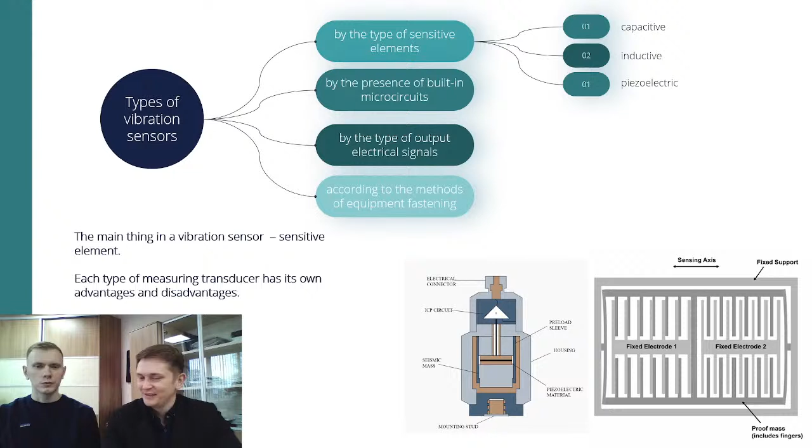So our sensor is a MEMS sensor. Which advantages? I think Vladislav will tell you more.

Good day everyone. My name is Vladislav, and I'm an embedded software engineer at Passat Innovation. So let's not waste time and start with the benefits of the VTS 3D. The first benefit of our sensor is noise immunity.

Yes, because our sensor is digital, it is not affected by noise, and the signal you receive, you can be sure that it's accurate and the data is not damaged or anything else.

The next benefit of our sensor is the length of the connectivity line. VTS 3D may have a connectivity line up to 1200 meters.

Plug and play connectivity. Because it is digital, you can easily connect our sensor, for example, into your PLC or PC. All you need to do is start reading the data. Compared to the class of analog devices, you don't have to connect converters to process the data, to write your own math algorithms, and anything like this.

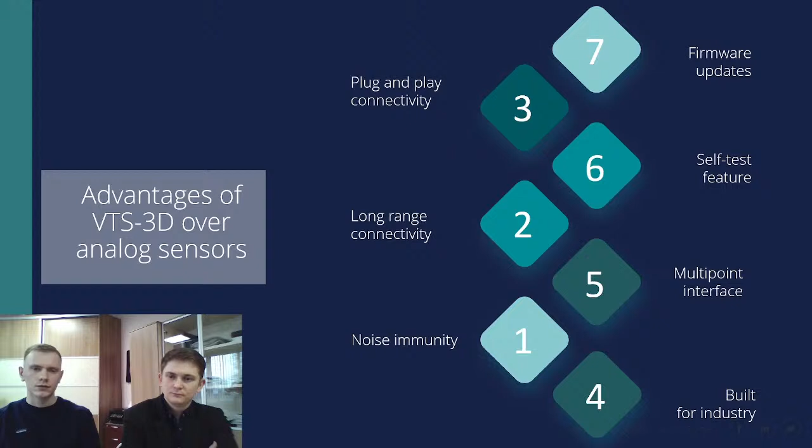Yes, as Vlad says, we can develop and easily update our sensor. For example, in January we had just 17 parameters: 15 parameters of vibration and 2 parameters of temperature.

About vibration, we had 5 parameters in 3 axes: RMS vibration acceleration, RMS vibration velocity, RMS vibration displacement, peak to peak, and peak factor.

And this month we have developed and added an additional parameter: frequency with maximum amplitude. About temperature parameters, there is the temperature of the casing of the equipment and the temperature of the environment.

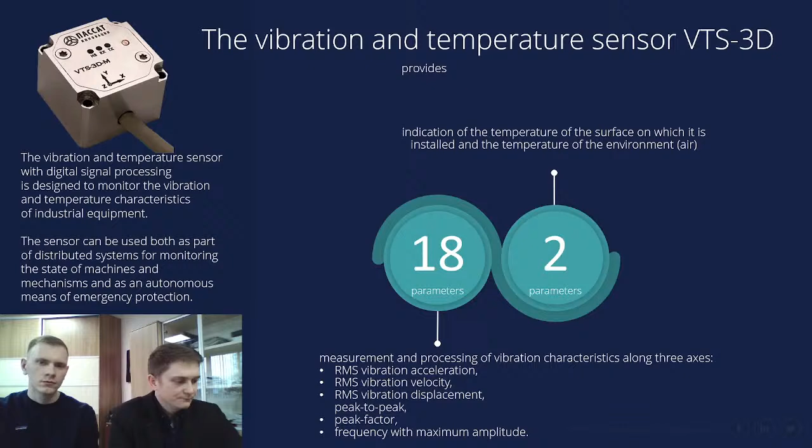About technical specification characteristics, our sensor has a frequency band for measuring vibration acceleration up to 5000 Hz. At this frequency we can guarantee good measuring with the errors that are shown here.

Also, our sensor has a degree of protection against dust and moisture. It is IP68.

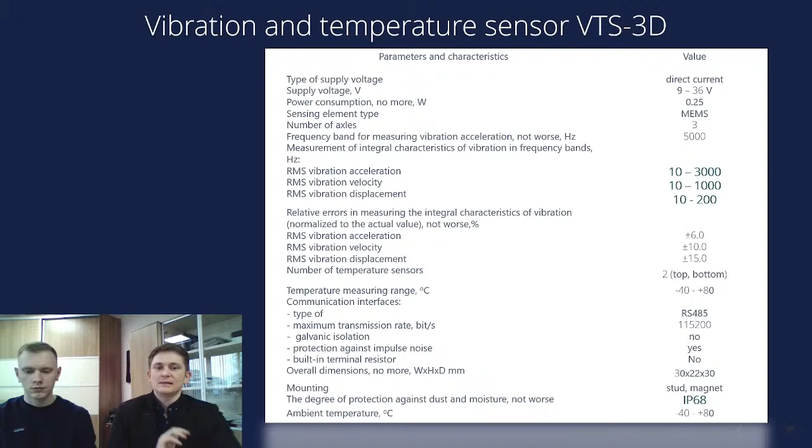Yes, the sensor has a lot of advantages. It can take a lot of parameters, but it has small dimensions - not more than 3 centimeters. The cable of the sensor is up to 2 meters.

Also, in the set of supply we have mounting platforms to install the sensor on the equipment. In the standard set of supply we have a stud fastening platform to install with a screw, and a magnet platform for faster installation of the sensor on the equipment. It is an additional item.

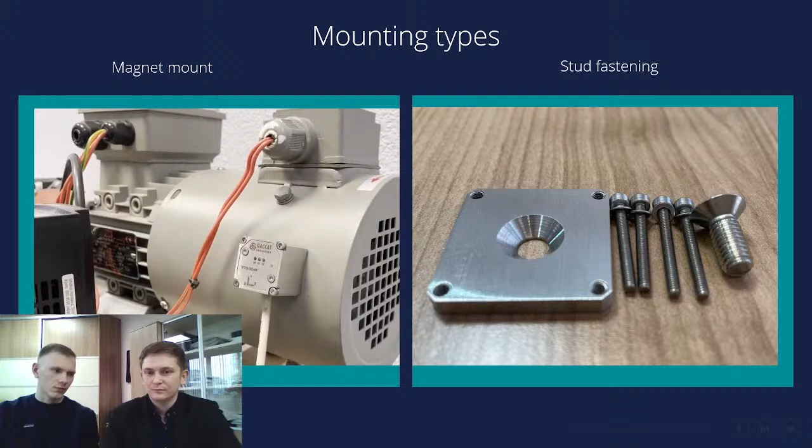About communications - in the general version, the sensor transmits data over RS485 according to Modbus RTU, but it is also possible to implement the sensor with CAN-open or LoRaWAN interfaces or protocols.

Let's talk about connection scenarios. Many modern PLCs support the Modbus protocol out of the box, and you can easily connect our sensor directly to a PLC, or if you don't have such a PLC, you can use, for example, a Modbus RTU to Modbus TCP gateway and simply migrate to Ethernet networks.

You can connect up to 32 devices in one port of the controller with Modbus RTU, without any additional devices. For example, to work with piezoelectric analog sensors, you should have additional infrastructure, additional converters, but here you can just connect one sensor to one port of the controller.

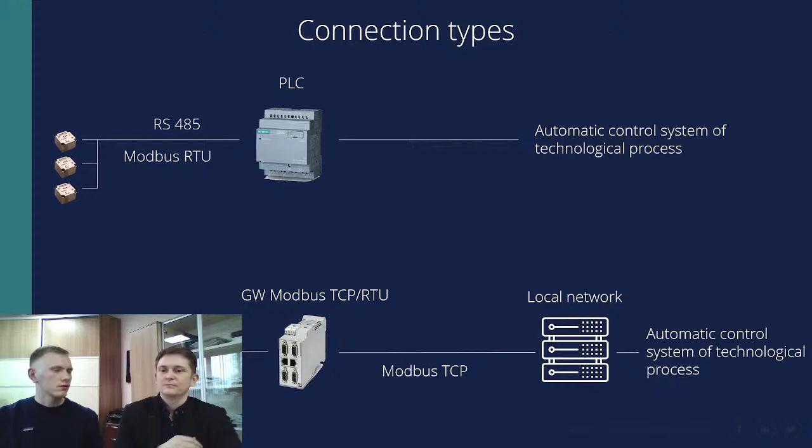And to work with sensors, we built our own software. Our software supports Modbus RTU and Modbus TCP protocols. You can configure sensor connection parameters, for example baud rate or slave ID, or if you talk about TCP connection, you can set your IP address, etc.

So you can also view the data. This software is free, you can download it on our website. So when somebody buys our sensor, they can download this software from our website and configure it to work with the sensor.

For example, you can also connect not only with a PLC, you can also work with a computer using an RS485 to USB converter.

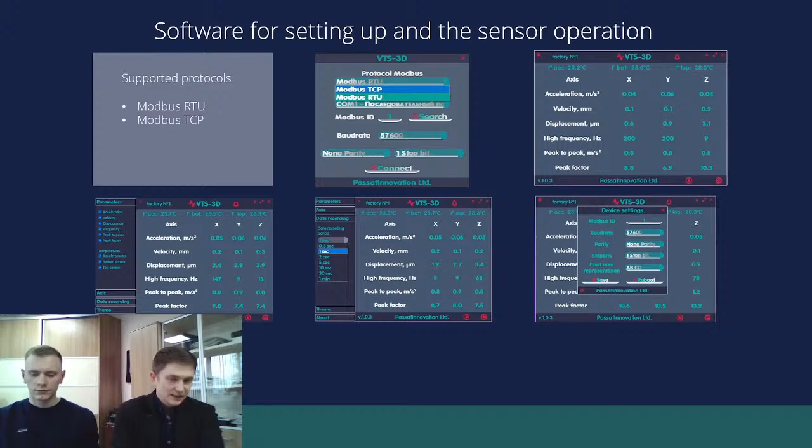So, I think it will be available in late February, yes? Yes, this month we will add it to our website.

Our sensor was developed in 2021, and we made market research to see our competitors, and we found a competitor from the USA. We bought their sensor and made our own test with our vibration stand, to compare the results of measuring of these two sensors.

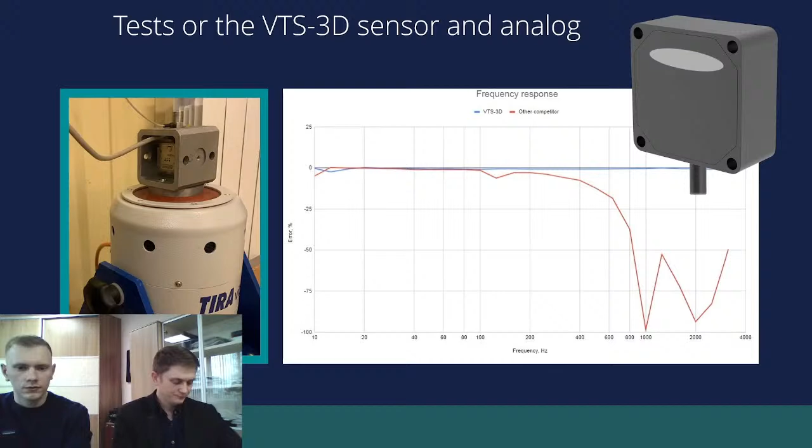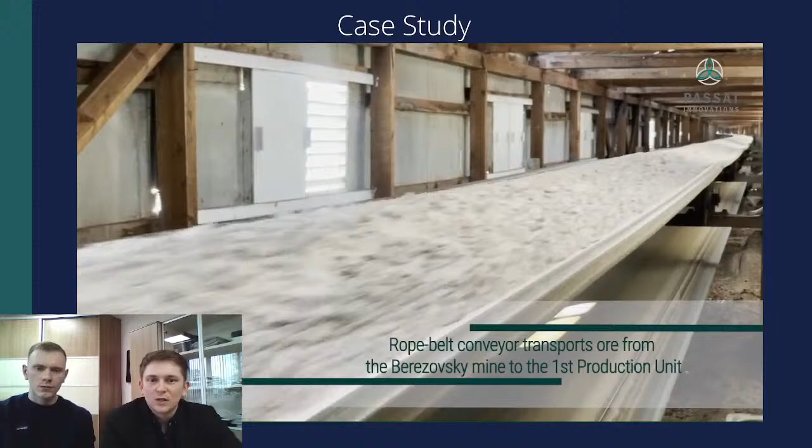So our sensor can be used - you can install it on pumps, motors, vents, and other equipment. For example, one of our end customers installed these sensors on a conveyor, a long-distance conveyor more than 10 kilometers long.

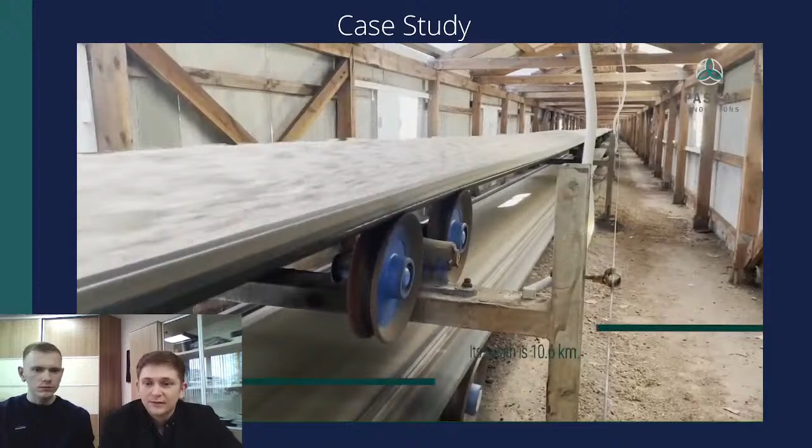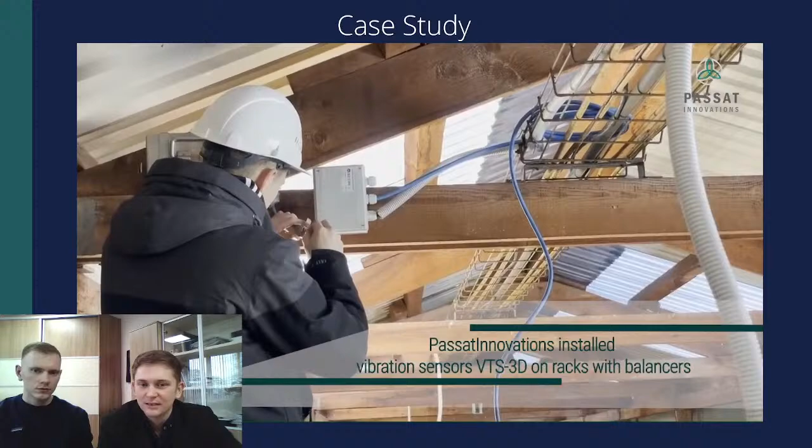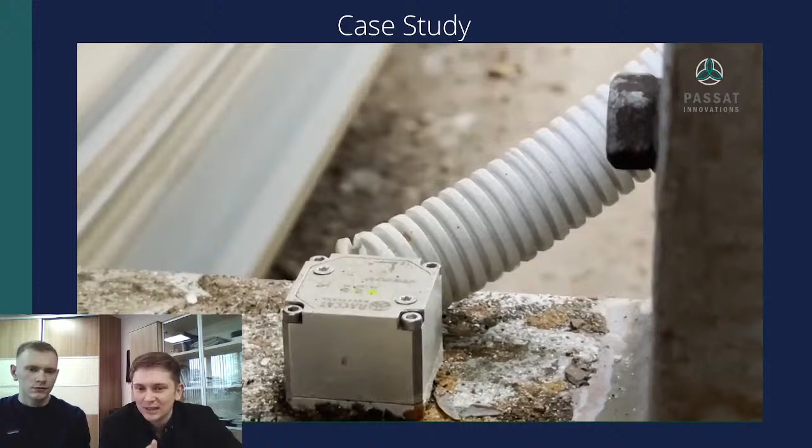To monitor the condition of these conveyor parts, the specialist of the end customer goes around this conveyor and listens and looks at the condition every day. It's a waste of time, a waste of money, a waste of human resources.

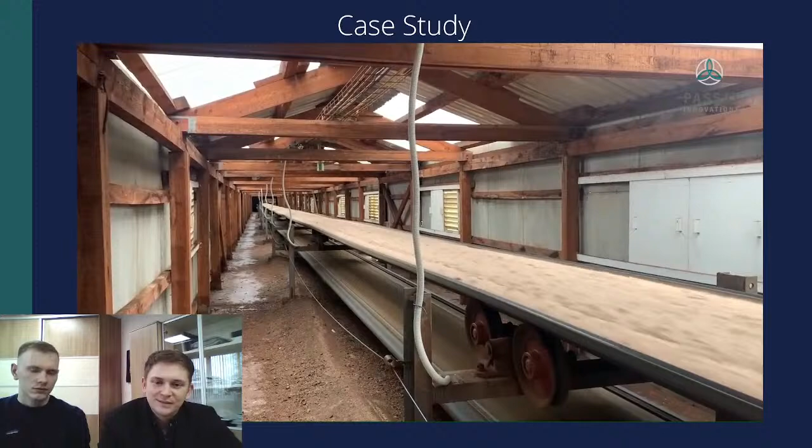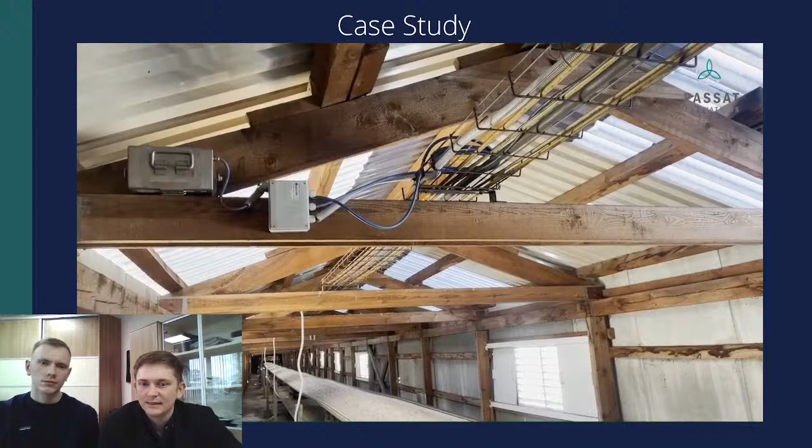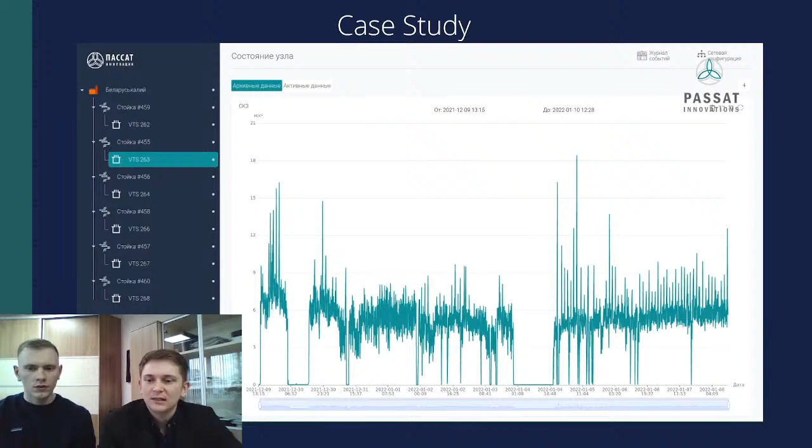We provided testing at that moment with 6 sensors on this test, and we collect the data from 6 sensors and transmit the data to the company using our wireless communication device.

In the company, they get this information and process it by our software. At that moment, we are developing our vibration monitoring system, and in this slide you can see some results.

Every day we add additional functions, and here you can see some results. For example, at the first part of this graph you can see a high peak. So it was at the beginning of our such project.

We collect the data from the sensor with the frequency 1 time per 10 seconds. Then we change the configuration to collect the data 1 time per 1 second. The second half of the graphic shows more informative results. Also, we add the moving average parameter.

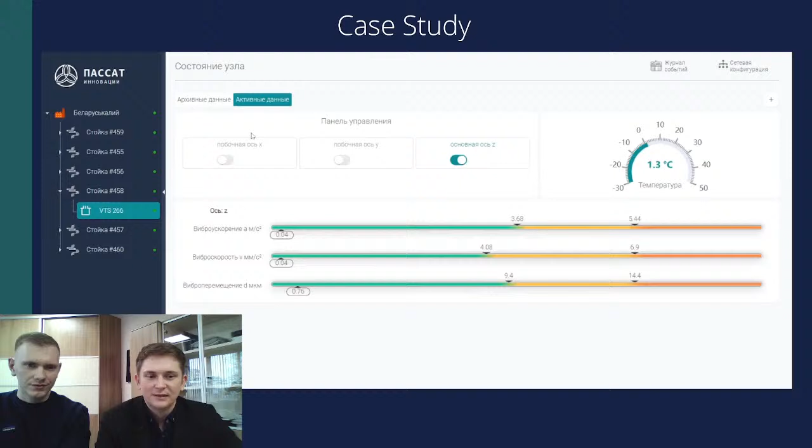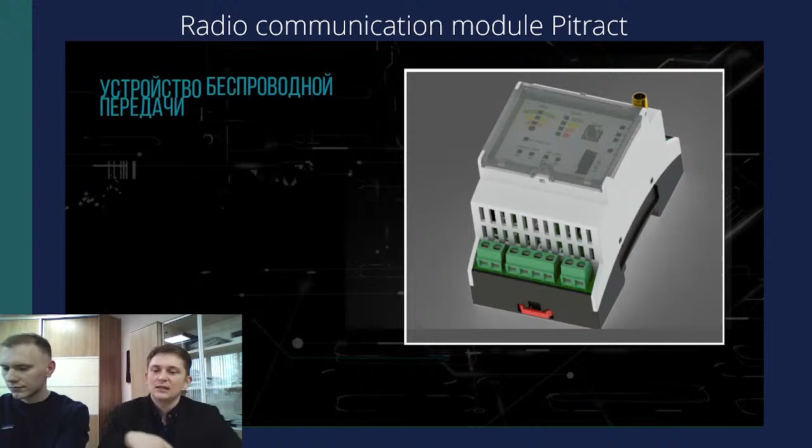As I said, to transmit the data, we use our radio communication module. The sensors are installed at 2 kilometers from the company, from the enterprise. So our device called Pitract helps to transmit the data up to 2 kilometers without cables and mobile connection.

About perspectives of the development of our sensor: in the nearest future, we will finish the wireless version, and it will use LoRaWAN technology to transmit the data, and also it will have power supply from batteries. Our aim is to make the lifetime of the batteries up to 2 years, I would say no less than 2 years.

And the next step that is also in process is explosion-proof design, to use our sensor in oil and gas production and some minings and so on.

And the final maybe step is to produce an industrial equipment monitoring system that can not only show the graphic and diagram, but can tell the customer that this equipment, this node, has some problems - for example, a bearing wear or casing cracks and so on.

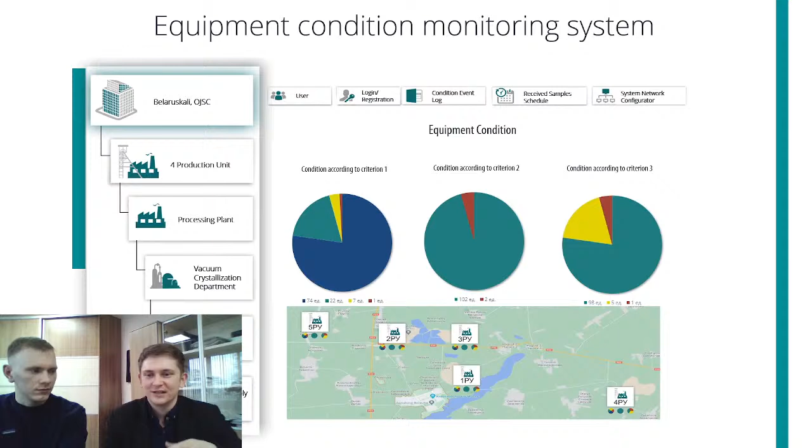So it will be like a stationary vibration diagnostic system. It will not be a cloud, it will be a local system with its own servers and so on. We think that this design of the system is more perspective and has more advantages than cloud systems.

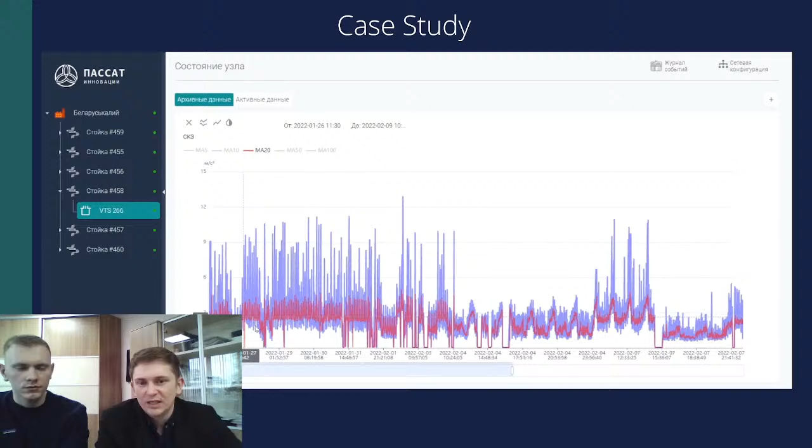We can connect to the system, and we can show you, we can give you more information, we can show the functions that at that moment the system can do.

Also about the production time, our strategy is to have some sensors in stock. For example, in February we will end the production of the parts, the set of sensors, and the next set will be ready in April.